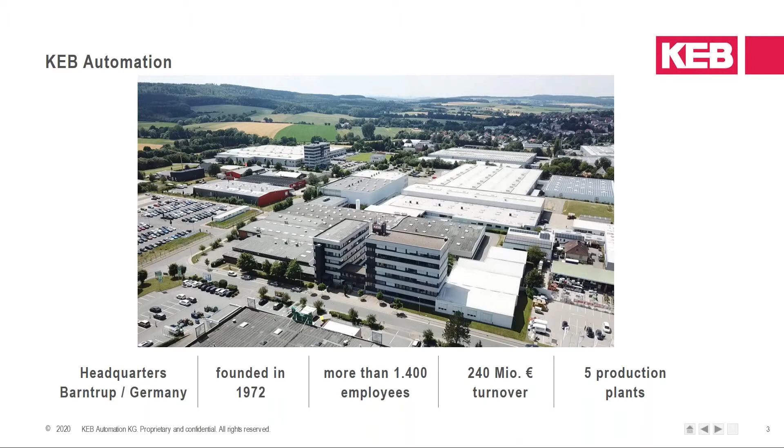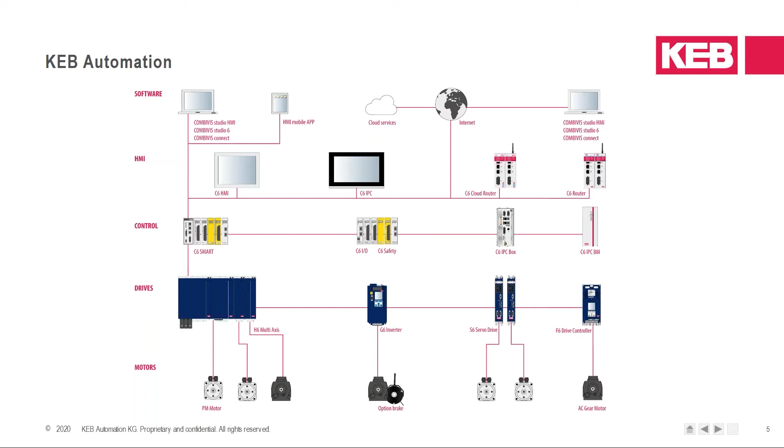So now coming to the product, the main target for today. As already mentioned, we develop and produce drives since about 35 years now. So F6 and S6 is our 6th or 7th generation, depends a little bit how you count. Both are all-round inverters, extremely flexible to use.

You can use them for simple V/F applications as well as for servo drive applications. You can use them for high-speed applications as well as for high-torque applications with low speed. It's usable with different kinds of encoders, but also encoderless vector controlled, with different motors, different field buses, so a very flexible system. The power range is up to 450 kilowatt at the moment.

S6 is designed as a classical servo drive and goes up to 7.5 kilowatt. 2 housing sizes are available there. And F6 is more designed as a classical inverter, starts from 4 kilowatt up to 450 kilowatt and in 7 housing sizes at the moment. Especially F6 has got a very compact design, especially in the medium and the high power range. In performance and functionality, both devices, F6 and S6, are equal.

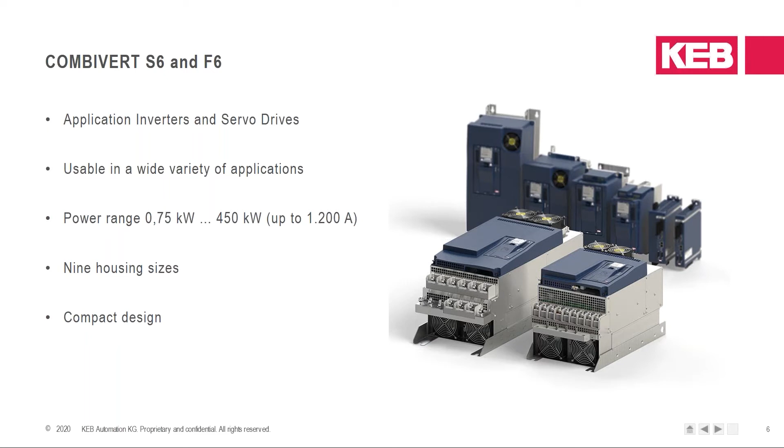So one of our core competencies are different kinds of cooling possibilities. Also this we're offering now in the 3rd generation. You can get the F6 as a push-through variant, so cooling outside of the cabinet, but also in the inbuilt variant inside of the cabinet, as well as liquid-cooled and air-cooled. The push-through variants are IP54 at the backside. The liquid-cooled are equipped with stainless steel pipes, and can also be equipped with braking resistors mounted on the cooling part.

Software-wise, there's a software functionality inside of the drives which can do the liquid cooling management, so which can control a valve, for example. This is available for the drive cooling, but it can also be done for a liquid-cooled motor, for example.

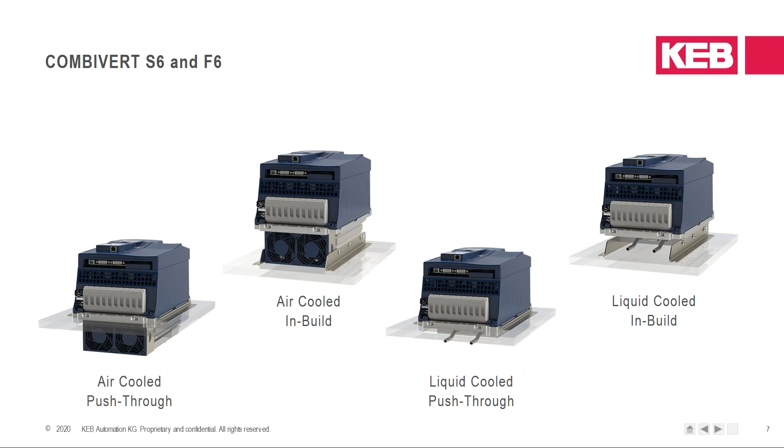In which applications can you use COMBIVERT S6 and F6? One of our main businesses is plastic machinery, for example extruders, injection molding machines, but also woodworking, especially for spindles, milling, sawing, drilling, and also CNC applications, also for metal machining. Then we use them in passenger elevators, in intralogistics like storage retrieval systems, construction cranes. It can be used in textile machines, including ring spinning machines or weaving machines, compressors, packaging machines, test benches, and many, many others. So you can see it's versatile in use.

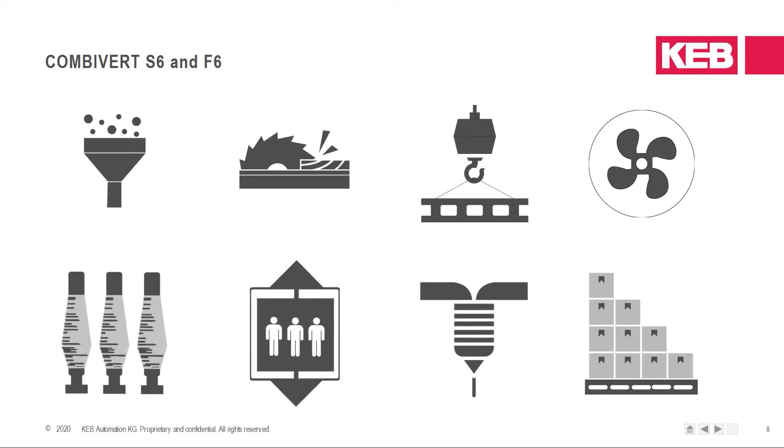And yeah, versatile is a keyword for me to pass over to Tobias. Okay, Stefan, thanks for this introduction of the COMBIVERT S6 and F6 products.

Let's speak about the functionalities for the scalable motor control management. The drive software is able to run 4 different motor technologies: the classic asynchronous motors, the dynamic servo motors, and the newer technologies like IPM and synchronous reluctance motors. Of course, there are different control algorithms inside the software, for example the classical V/F mode, and for the other parts, closed loop with encoder or closed loop without encoder is also possible with these COMBIVERT S6 and F6 drive controllers.

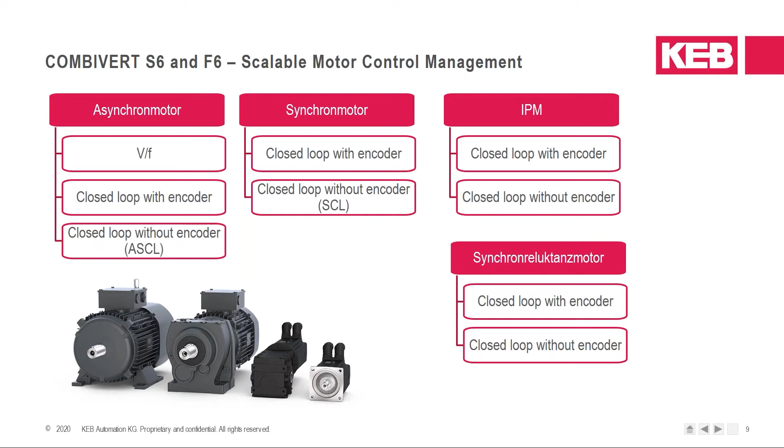On the next page, I would like to give you an overview of the closed loop control without encoder for asynchronous motors. We call this ASCL, and the basic information like rated frequency, rated speed, or rated current has to be entered from the type plate data in the COMBIVIS software, our tool to put data into the drive. And at the end, the identification of the extended equivalent circuit diagram data will be handled by the ASCL software itself inside the drive.

This control mode is based on an image of the motor data and the measured drive controller output current. And output filter technology like motor chokes or sine wave filters can be easily integrated into the motor model. On the right, you see some features of the ASCL. We extended the features of the ASCL in general, with optimization for smooth motor rotation at low speed, and other features to have good quality in the total speed range.

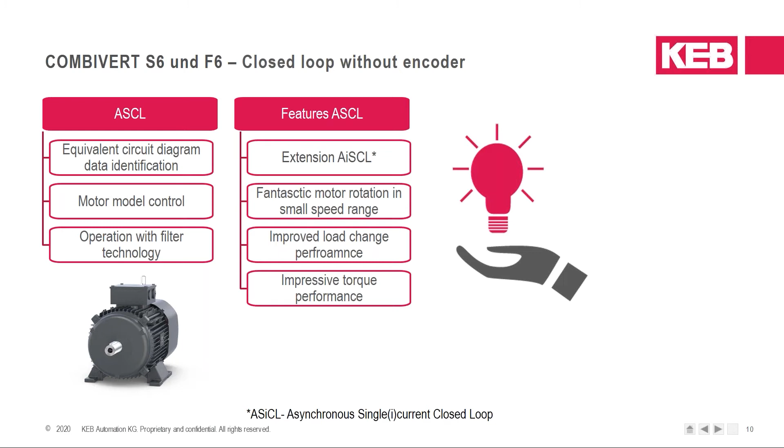This was a new feature of the ASCL control mode.

The next page is about the closed loop without encoder for the synchronous motors. It's similar to the ASCL, but of course it's not equal to this. Based on a motor image of the motor and the identification of the current measured by the drive controller, the motor models calculate the speed, for example, and the actual status of the rotor. Especially high-speed applications with filter technology are often equipped with KEB filter technology due to the motor characteristics.

The features of SCL are split into some sections on the right. We at KEB are proud to offer our customers encoderless positioning with a fantastic performance. If you have got any questions about this special performance, please get in touch with us to find a solution for your application.

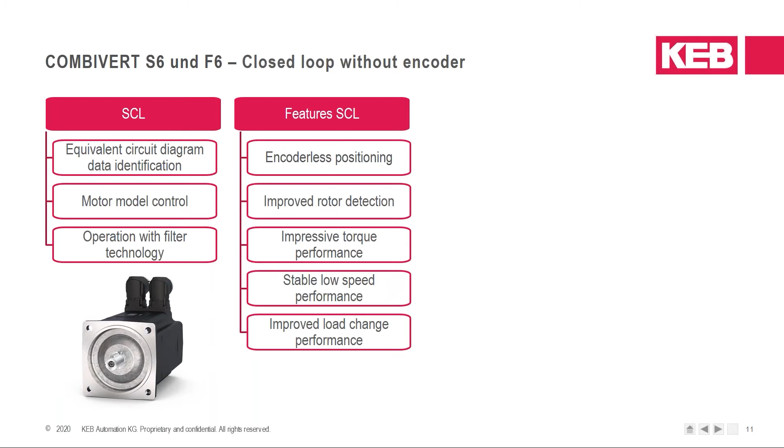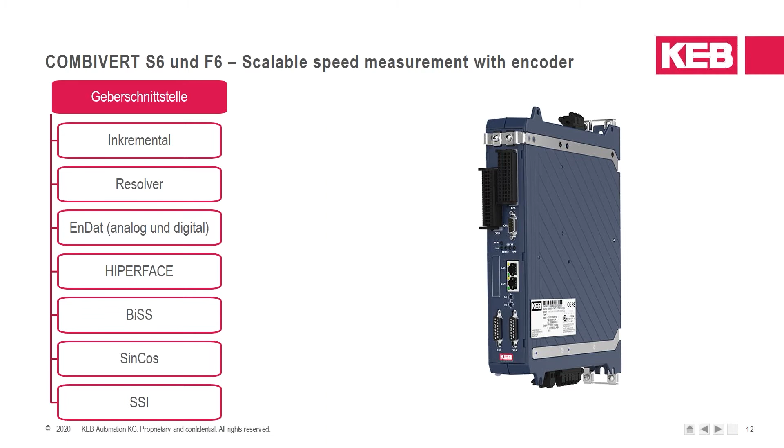On this page, I would like to talk about scalable performance. Scalable performance, what's behind this message? The evaluation of application requirements for the drive controller could be done with our application team, and KEB supports you in the drive controller selection as well as in the questions of the performance topics.

Which field bus do you like to use, or a standalone operation? How should the drive control loop be set up within the application? For example, the switching frequency, which is available up to 16 kHz. We will find a suitable solution for your application.

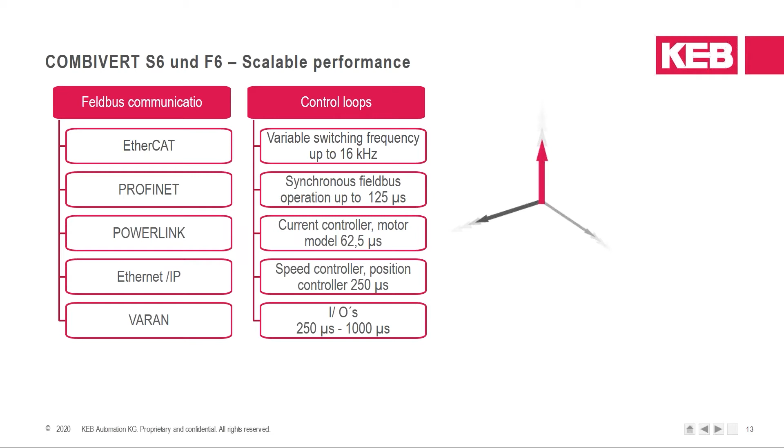The two drive controllers support the device profile CiA 402, which shows the following operating modes: cyclic communication via PLC control, or operating modes with PLC control or without PLC control. The classical standalone operation with digital inputs is also possible. Now I will show these two operating modes in two application examples to get in touch with these two different possibilities.

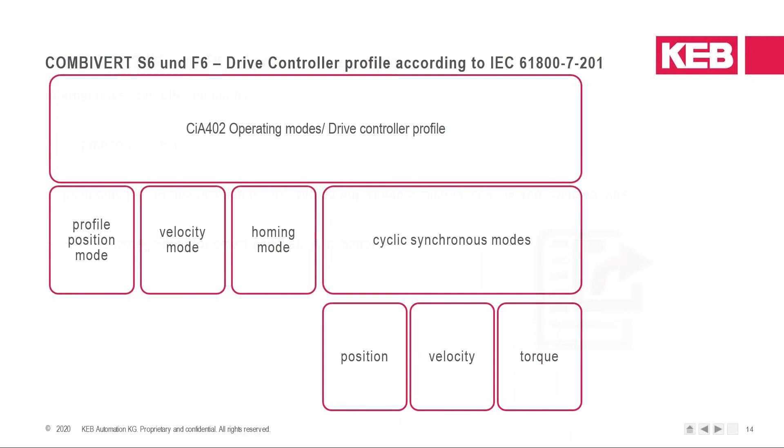The first application example is about the internal drive controller function. For example, at first, the jog mode with the motor POTI function for easy and fast speed configuration while the process is running, for example, change a speed or a torque, whatever, or emergency operation to move the machine if the bus communication breaks down. This was the jog mode with motor POTI function.

The second example is positioning with up to 32 internal positions and speeds. The process changes by adjustable conditions transform the drive controller of KEB into a small PLC. This is a position mode, profile position mode.

The last example for the standalone operation is the recipe management for smart application management. You can load internal settings such as acceleration times, target speed, or speed controller settings via digital inputs or by bus to the drive controller. The different motor types can be configured quickly and easily. Keyword in this case, multi-motor, one drive.

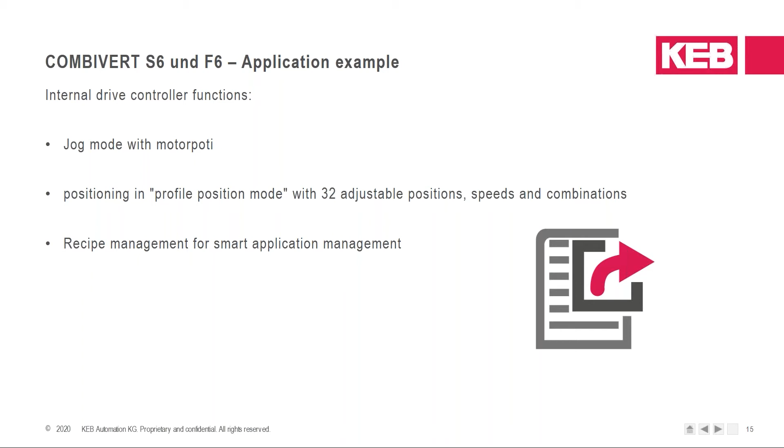The next page shows the interaction between controllers and drive controller. In this case, the box IPC is a master in the application and takes over the control task. The controller sends and receives set and actual values to the drive controller via the fast EtherCAT field bus communication. Cyclic means in this case that the master and the slave exchange the data in the same clock cycle.

The physical motion at the end on the motor belongs to the profile which we sent from the master. The drive controller works depending on the operation modes in speed mode, for example, or torque-based. Safety tasks can be realized with a safety over EtherCAT channel called FSoE.

In this case, you see the FSoE communication is ready with the EtherCAT communication, and the functional safety part is handled without the digital IOs, just over the FSoE part. Yeah, now I hand over to my colleague Stefan.

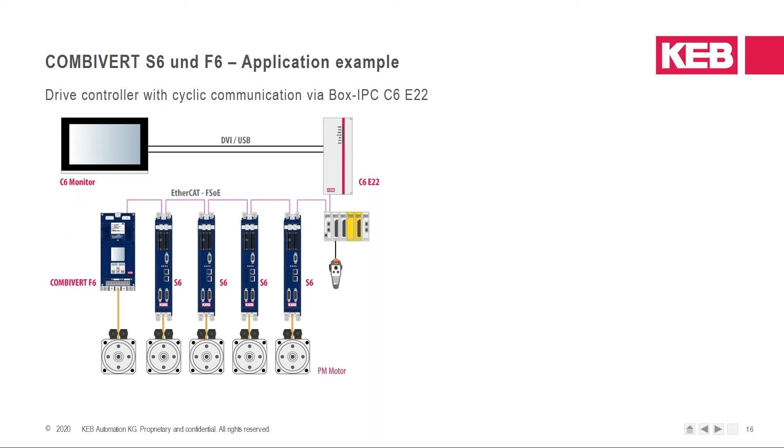Yeah, thanks, Tobias. So FSoE, this brings us to the scalable safety technology, which is integrated in the drive. In general, all drives are equipped with STO. Another function which is available is SBC, safe brake control. Besides that, there are various speed and position dependent safety functions which you can see on this page, like safe limited speed, like safe limited position, and many others.

Speed dependent safety functions with encoder are possible, but also without encoder, which means for some applications, speed dependent safety functions like SLS can be used without using a safe encoder.

Encoderless speed-dependent functions can be used in applications up to PL d and SIL 2, all others with encoder and STO and SBC up to PL e and SIL 3. The safe fieldbus, as already mentioned, is Safety over EtherCAT, FSoE. This allows the use of all safety functions without external wiring. But, of course, there can be a mixed operation with FSoE, and also safe digital inputs are possible, because if you have an end switch, it can be connected in parallel.

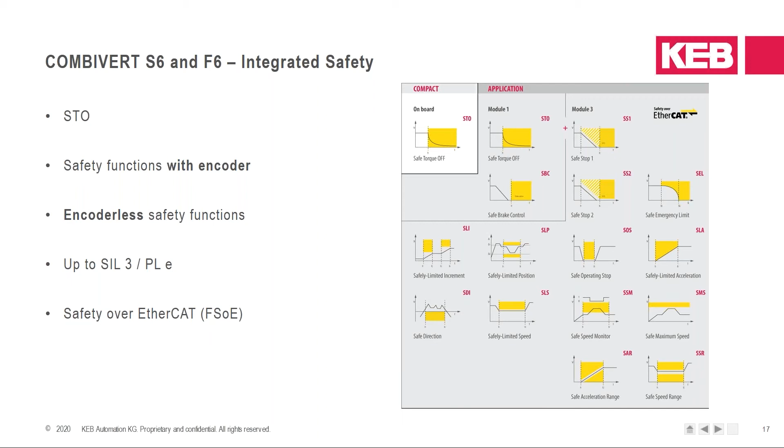That means, for example, if there is a handling system moving with shortened overtravel ways, and that should use safe limited speed, then you may need a certain safe speed for maximum speed or for operation speed. Then you may need another maximum speed for the reduced speed in the overtravel way when you're entering it. And it can be different when you're leaving it, because then you can maybe be faster.

Then retraction by hand can be another limit which is necessary, and a certain setup mode can be the fifth limit. So as you see, this is very flexible to use. Up to 8 data sets can be stored. All the sensorless functions can be used with induction machines, synchronous servo machines, and also synchronous reluctance machines.

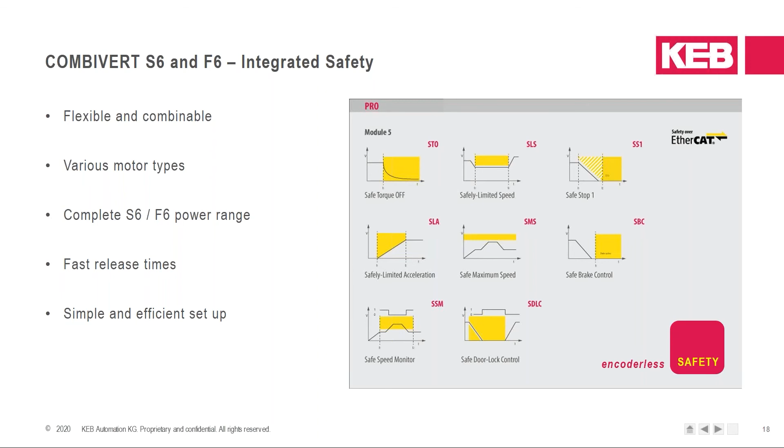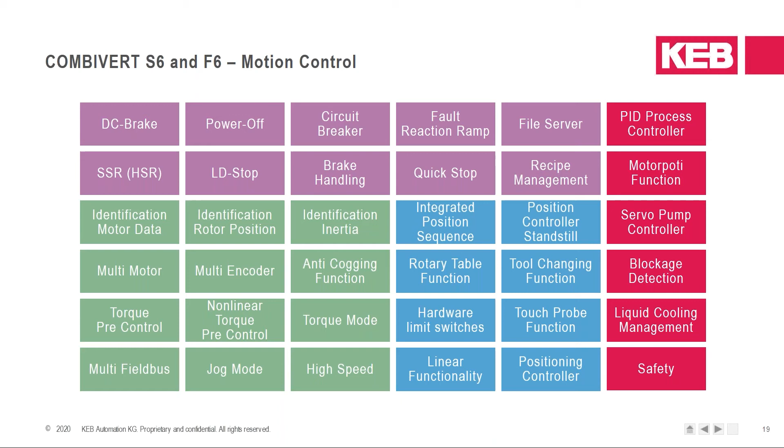The tripping time is very fast. It's below 3 milliseconds, which is fast for a safety tripping time. These safety functions are available for the complete S6 and F6 power range. Coming from safety to motion control. On this slide, you can see a selection of software functionalities which are integrated in the drive. This represents the possibilities or the flexibility. I took 3 examples out of it, which I want to show you a little bit deeper.

First example is the power off function. How to explain this? I think the best way to explain it is an example. If there is a ring spinning machine working on the network, and there's a short supply voltage drop, under normal circumstances the drive would trip in undervoltage error and the motor would stop uncontrolled. On these machines, that would mean that all the yarns would break at the spinning points and hundreds of yarns would have to be tied up again. This is usually done by hand.

To avoid this case, the power off function can be used. The inverter detects power failure in that case and automatically synchronizes the drives to reduce the yarn breakage. If you think about it, this function is also useful for many other applications.

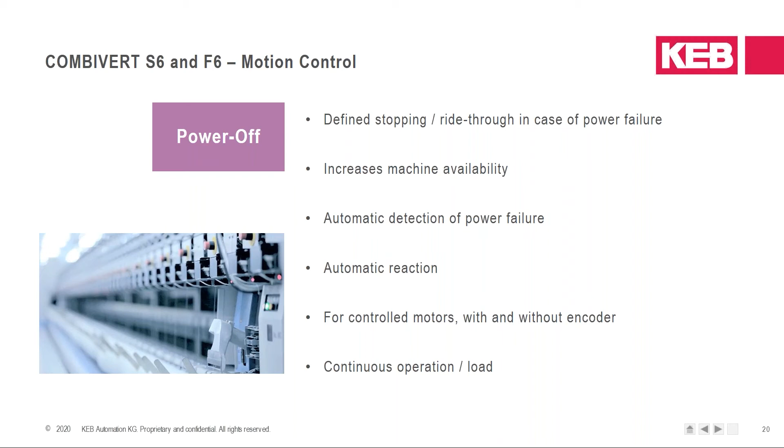Another example of software functions integrated inside of the drive: KEB COMBIVERT S6 and F6 are able to operate high-speed motors up to 2000 Hertz, for example, spindle motors. This can be used for synchronous machines and also induction machines, with and without encoder. Of course, if you use an encoder, you need to take care about the limiting frequencies of the encoder itself. We support you with the dimensioning in this case, because it can be tricky. And we also offer accessories for this: sine filters, chokes, and so on.

In contrast to high speed, there is high torque, which can be solved with the same drives. High torque motors on extruders, for example. That means slow running machines with a high number of poles and high torque. An example I had in the past, a 40 pole motor with 255 RPM and 45,000 Newton meters, can also be solved with these drives.

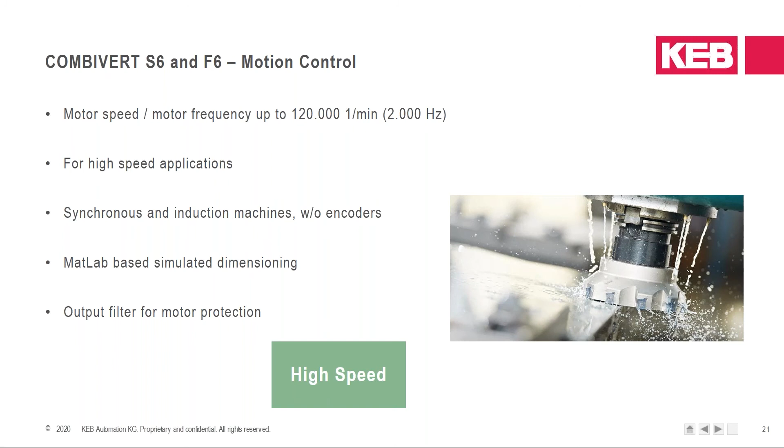So, the third example, the internal servo pump controller. In this case, the F6 drive operates a synchronous machine or an induction machine, which is mechanically coupled with a hydraulic pump. The F6 regulates the motor or pump in order to adjust the oil quantity or the hydraulic pressure, according to the demands coming from the controller. This can be done very highly dynamic, like in an injection molding machine.

And the general advantages of these solutions are high energy savings. That means less losses, and because of less losses, cooling capacity in the hydraulic system can be reduced or sized smaller. Also the lifetime of the hydraulic components can be longer. This software function also includes an internal pump protection, to save the pumps.

And also we have a wizard in our COMBIVIS operating tool for commissioning and to set up this function quite easily. And before I hand over to Tobias, all these examples have been developed together with customers. And this is also one of our strengths, developing solutions together with customers.

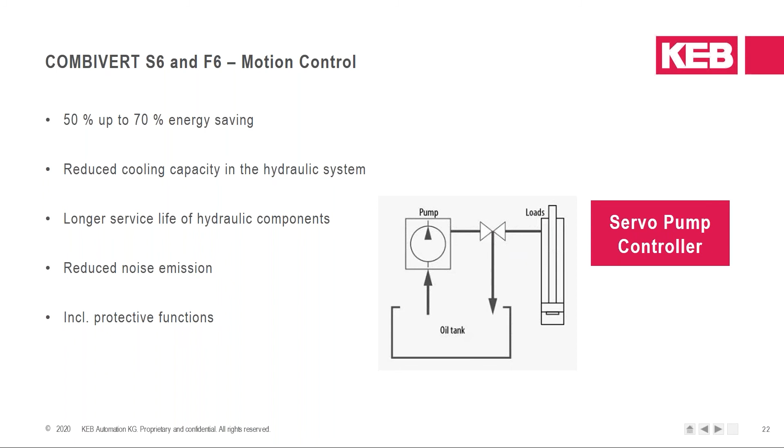Okay, thanks, Stefan. So in the next pages, I will give you an introduction of our communication tools. COMBIVIS 6 is the drive controller handling tool. It's a free of charge tool. And in addition to the standard functionalities, the startup wizard is a highlight of this software. Of course, the servo pump wizard, but also other wizard functionalities are given by the COMBIVIS 6 software for an easy startup of asynchronous motors and synchronous motors, or to activate some error levels or other identification alarms.

Further COMBIVIS tools are for the control and automation sector. We call it Combivis Studio. This is an engineering tool for configuration and programming. And we have soft motion according to the PLCopen standard available in this Combivis Studio tool, and CAM and CNC functionality. Further software possibilities are Combivis Studio 6 Safety, Combivis Studio HMI, Combivis Mobile, and for remote access to the drive controller or to the complete KEB solution there is Combivis Connect.

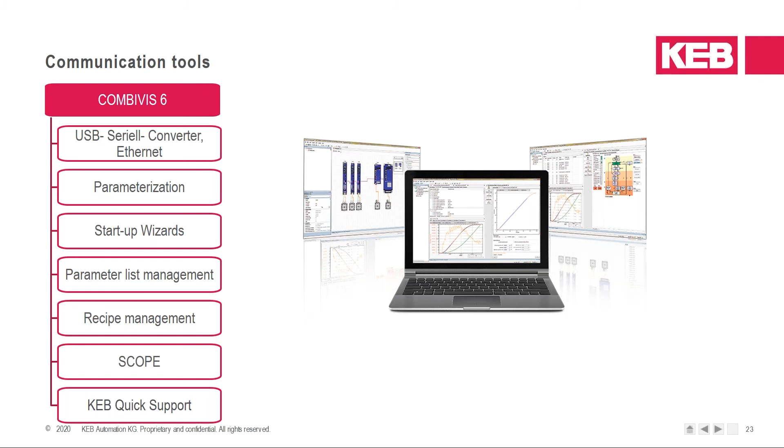This page shows you the Combivis Mobile. This is a smart connection to the drive controller. Highlights are, for example, the dashboard with configurable parameters for your favorite parameters, and parameter list management for easy exchange of parameter lists in service cases. This mobile app is available for Android and for iOS.